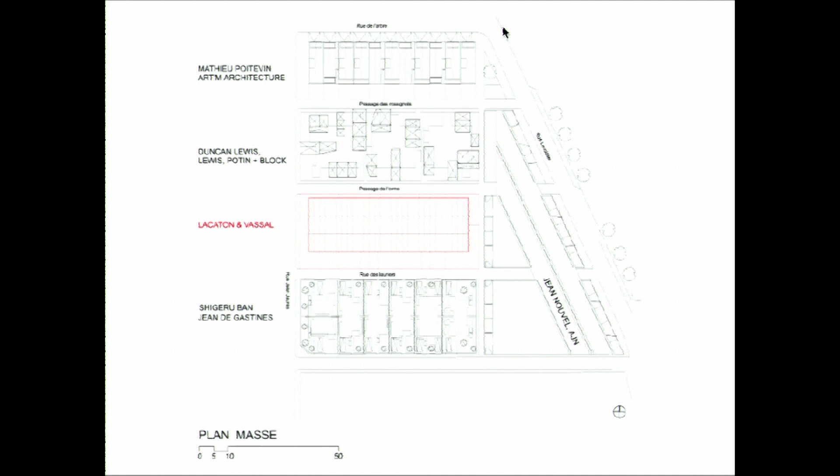But very early in the discussion with the client, we came to the relationship between the dimension of the dwelling and the cost of the rent. Because normally, it's not a regulation, but the rent is calculated in function of the surface of the apartment. And in that case, our proposition, as well as the one of Jean Nouvel, was to develop this very large housing. So we discussed that with the owner: if we engage to build these dwellings in the budget, you must, on your side, engage that you will not increase the rent because the dwellings are much bigger. You must engage to rent them in function of the type and not in function of the dimension.

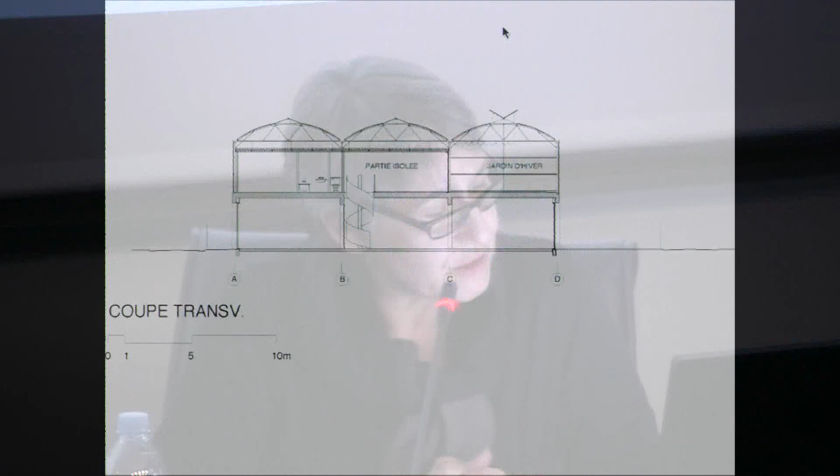So we agreed together, and at the end, we managed to make the project, and he did what he promised. So the construction arrived to make this project in the same cost. Of course, it's not a kind of magical project, but it's a very rigorous work, starting from the structure. The first thing is to build a very efficient and cheap structure. We work always with open structure. It means columns, beams and floors. We hate to make walls, and we try always to avoid solid walls, because we think that it's more interesting to have open structure.

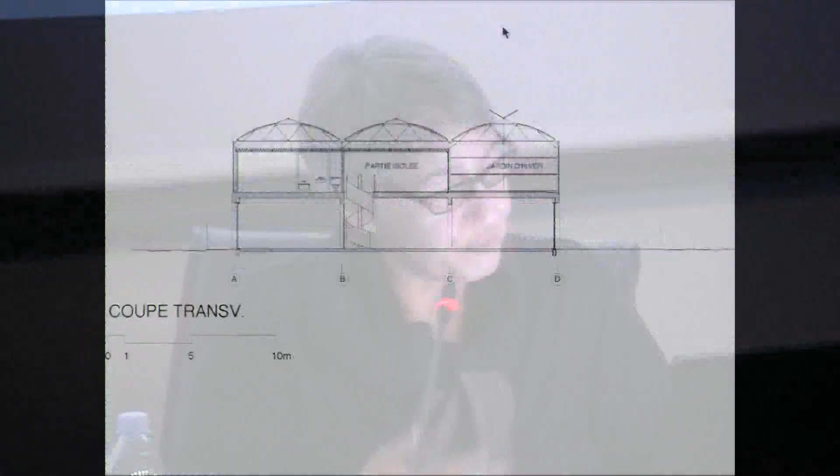So in that case, we thought that we could build first a very, very big loft. And we proposed to build a construction with a ground level made with concrete platforms on concrete columns 3 meters high. And on the top of this platform, to build 3 ranks of greenhouses. But these greenhouses come from the catalog of prefabrication, so we didn't design anything of these greenhouses, but just decided the dimensions, how many openings, and some of the materials.

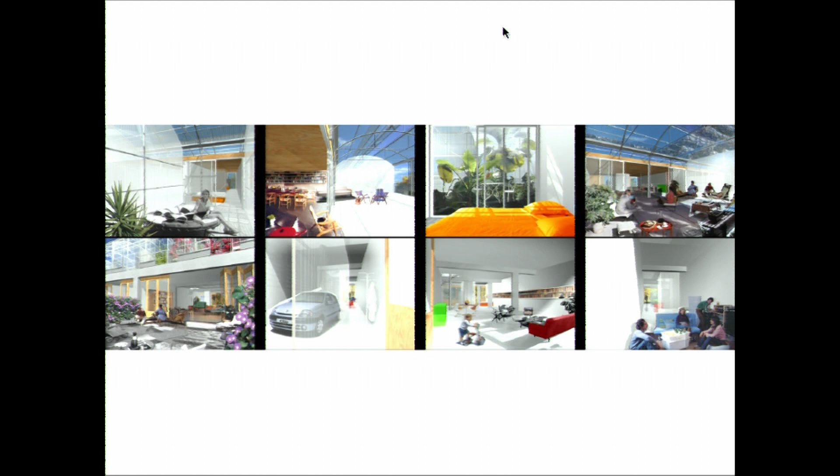So that was the first step of the design, to use 100% of the ground that we could use, and then we proposed that every dwelling would have 2 levels, spaces on ground floor and spaces on the first floor, to have the 2 atmospheres inside the house.

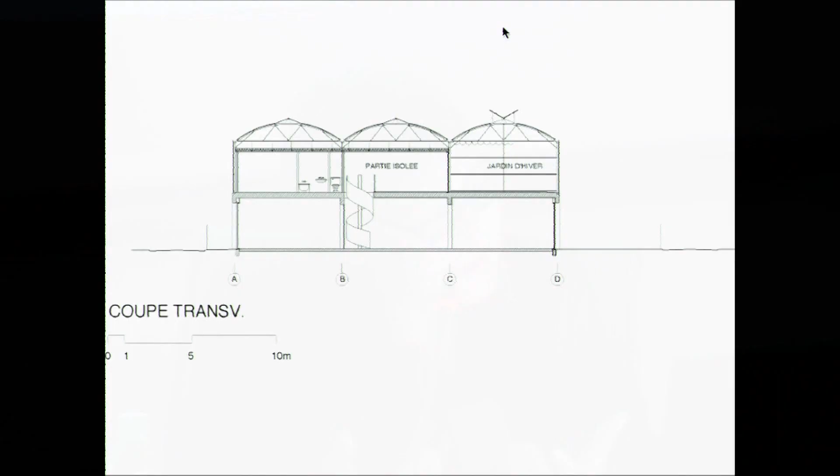The greenhouses were also very interesting in terms of bioclimatic construction, because it takes all the sun to heat the house in winter. There was very large ventilation, so in summer it's quite a good atmosphere. And the greenhouses make a kind of intermediate climate between outside and inside, and it prepares external conditions to inside conditions, and the difference between inside and outside becomes lower.

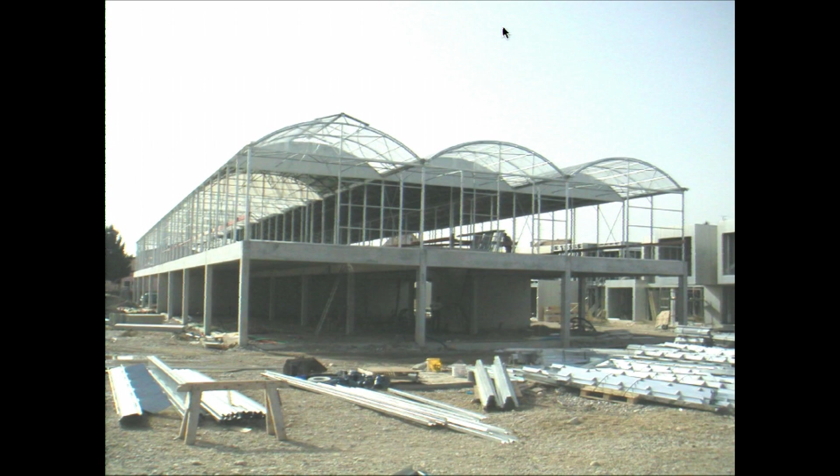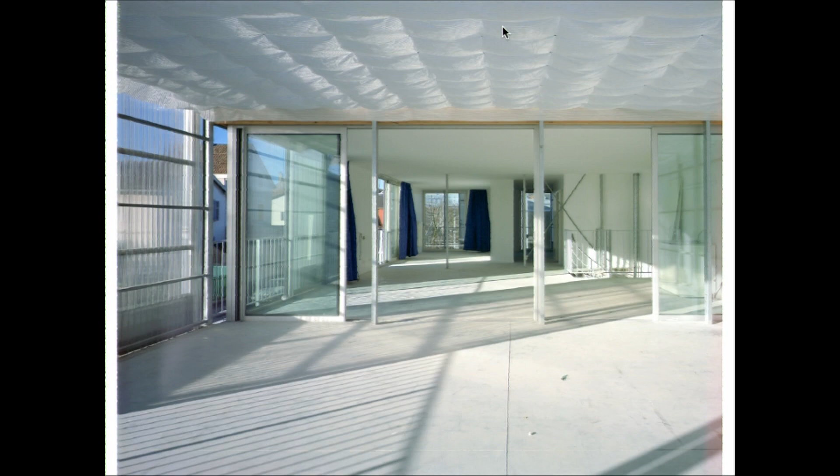Then we started the construction, because we had the contractors, and we could build this project within the cost which was given. So the ground floor with this platform, the 3 ranks of greenhouse, and the project completed for 14 families. The dwellings are empty before the families come. It's a very big open space. The living rooms have an average of 60 square meters. And the dwellings are in between 130 and 185.

We use for the greenhouses all the systems that allow to create the best climate, including 2 kinds of curtains, thermal curtains, but also solar protection curtains. And this was the construction. Then the second step after building this very big volume was to divide it in 14 dwellings.

As explained, we wanted every dwelling to have part on ground floor and another part on first floor. We proposed that every dwelling should have 2 orientations, crossing orientations, and 2 dwellings are combined. One is quite big on ground floor and small on the first floor, and the other one is the opposite. It's small on the ground floor and large on the first floor. And on each corner, it's the special small apartments or special big apartments.

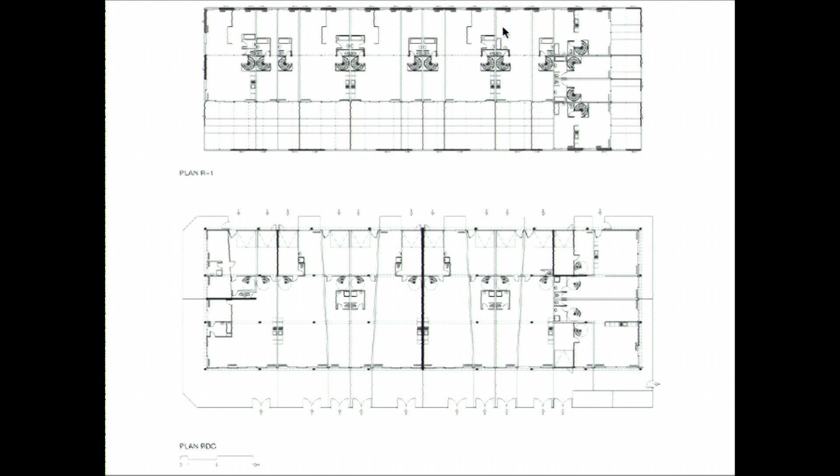So the other point was to make the divisions. We said that every living room should have a glass window 6 to 7 meters large, and every bedroom should have 3 meters. So it gave us a division of the periphery, and we could design every apartment. So some pictures of the apartments some time after the completion.

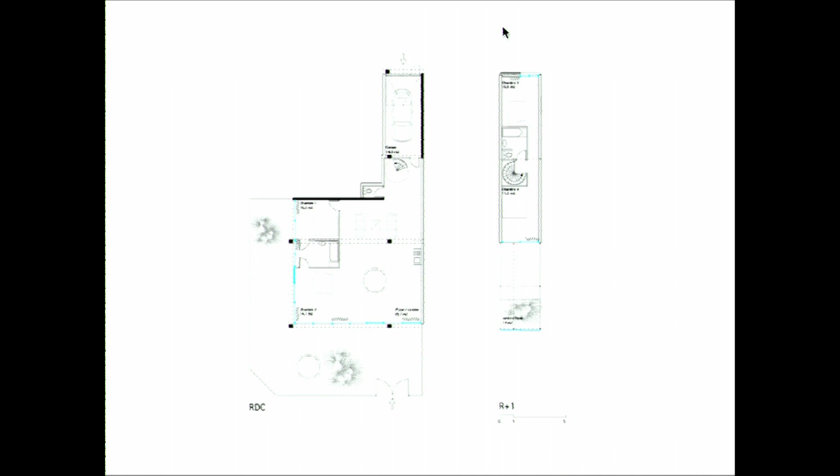As you can see, many apartments have no partitions because we considered them in a way as a loft. Normally, a loft is a space gained in industry or buildings which are not made for residential. But the space is very often so big that you don't need to introduce partitions, because the space acts as a partition. So in this project we proposed to do the same, to make the experience of not making partitions, but the owner had doubts a little bit, and we agreed.

He also asked all the other architects to come back every 6 months after the completion during 2 years to meet the inhabitants, to discuss with them, to see what was not working, and eventually to change something. So we were ready, if the families asked for partitions, to introduce partitions. But finally, after 2 years, no family asked for partitions, and they arranged themselves.

So it's very important to consider that what we hear very often from developers is that we must build standard housing because all families are standard families, that all people live in the same way. But in fact, you can think differently, and if you provide different conditions, people know how to use it, and you don't have to explain to everybody how they should live. If you give the best conditions, they know how to live inside.

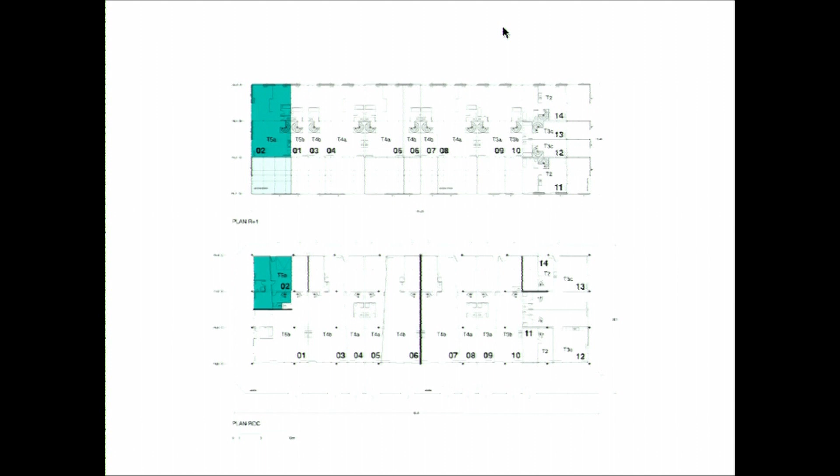So the little winter garden, sometimes in front of the bedrooms. Another dwelling, which has 2 bedrooms on ground floor and 2 bedrooms on the first floor. The ground floor in front of the bedrooms has a little swimming pool, only in summer. Here you can see these thermal curtains, whose outside face is aluminium to reflect the sun, and it's put very close to the glass. So in winter it keeps the temperature inside, and in summer it reflects the sun.

And this winter garden in front of the living room was 40 square meters. It's interesting to think that this kind of housing is very interesting to develop in cities, to introduce again this idea of living in a house, even in a dense context. We think this kind of housing could be superimposed to make big buildings, but for us it's one of the conditions to make the densification of cities acceptable to people, to give the best individual conditions. Densification should not be compression of individuals, but the opposite, it should allow to give more to each individual.

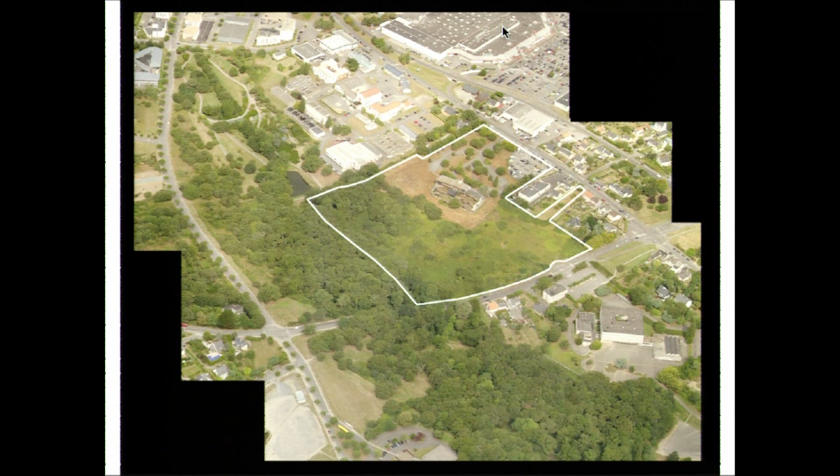But the plot where we had to make this project was quite a nice forest, but this forest was reducing and was dying. And the competition was to make, for this eco neighborhood, 250 individual houses on this plot. So this competition was very disturbing, because on one hand, there were these requirements to make ecological development, and on the other hand, 250 houses were asked.

And when we did the first test, they covered all the floor, and there was not anymore any forest. So we were really disturbed in this first phase of the competition, and finally we were close to thinking that maybe an ecological neighborhood should better reinvest some parts of the city which are already built, much more than build on existing forests. But that was the first intuition, and we started to work even on this project.

In the middle here, there was a very nice building, which was part of a little university, but it was abandoned, and they planned to demolish this building. So the visit on the site, and it's why it's so important to have the feet on the floor and not to see the thing from the sky or from the side, it's because all these feelings were very strong when we were walking on the site with this forest. We were working with a landscaper, who focused on all the qualities of this place.

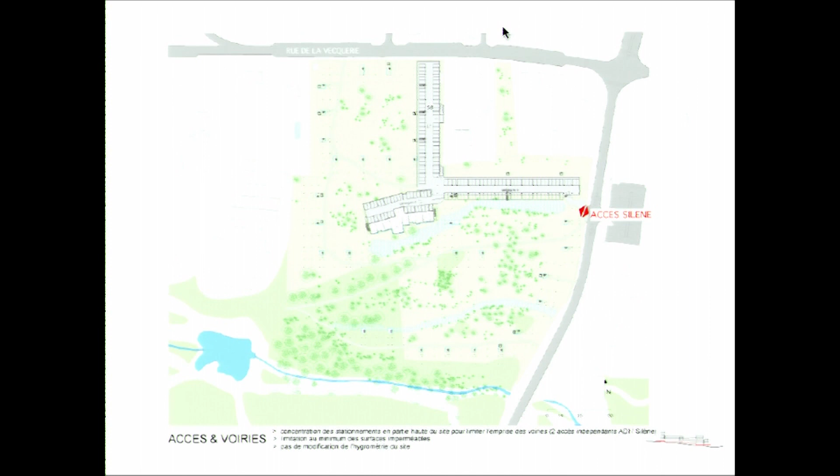So we proposed to make this platform at 12 meters above the ground, which was built with steel elements with very low impact foundations, only columns in the ground. So here this is the ground floor, where you see only some little stairs which were hung on the platform and some elevators. Then at 9 meters above ground, there was a common pathway to serve all the stairs, all the elevators.

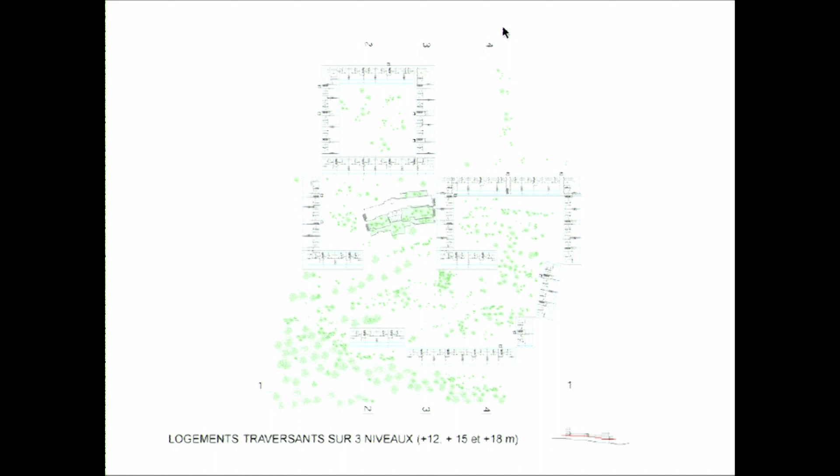And the first level of housing was 12 meters above, which was the top of the canopy of the trees. And there were three levels of dwellings at 12, 15, and 18 meters. So that's a section on all the ground, and this construction allowed us to keep the forest in totality, and to think that the forest could restart and evolve in a good way.

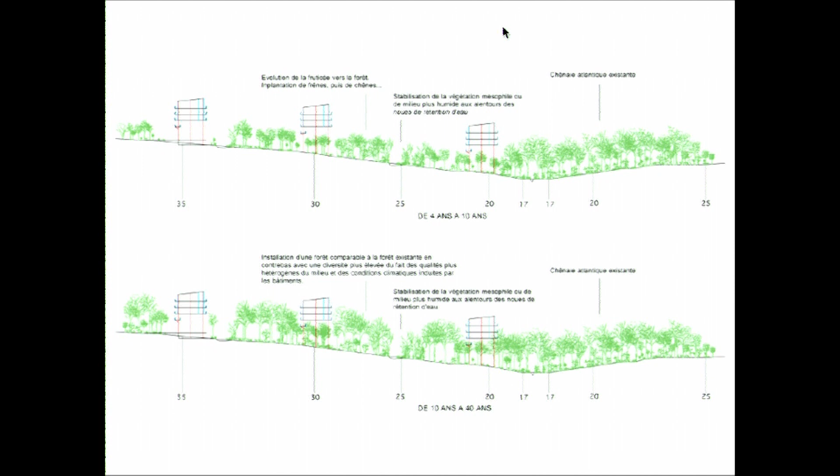These were some tests of the landscaper, the existing, then 4 and 10 years later. And then here we could expect that 10 to 40 years later the forest could come again, natural forest. And also it was interesting because the ground could be kept as a public park or public forest as it was before. So unfortunately we lost the competition. But the project is never lost, and I think that sooner or later, we can reintroduce this idea somewhere in another context. So that was the past.

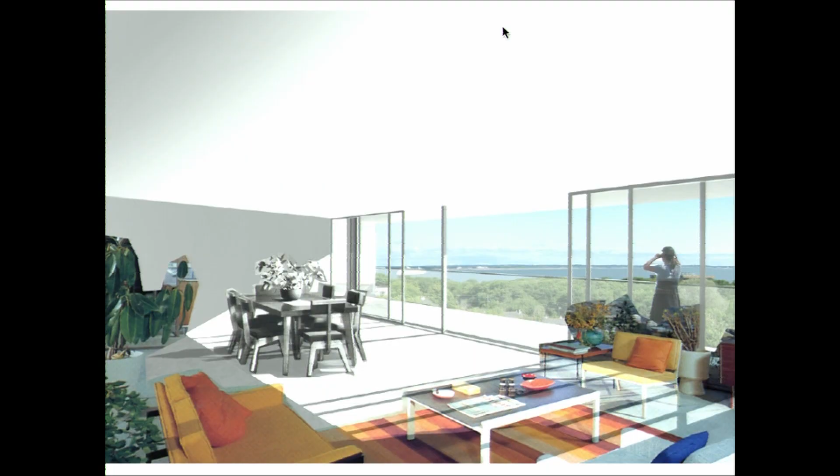So reinvent the standards. It's not only working for housing, but it can be the same for a school of architecture, and that was a competition that we were invited to in 2005, I think, or 2003, in the city of Nantes. It was a new school of architecture in the city, which already had a school, but the school was not in the city. It was in the close suburb.

And they needed to extend the school of architecture, and the school wanted to take this opportunity to leave their site and come back to the city, on an island in the center of the city, which was a former industrial site, because all the industries had moved, had quit. So there was an ambitious master plan to redevelop a new neighborhood here and to become the new city center. So the plot, the site was here.

It was divided in 2 parts, and we were free in the competition to build on both plots or only on the biggest one. So for this project, we proposed in the competition to work in 2 steps. The first step was to follow the requirements of the school, to make an open space where they could develop different kinds of pedagogy, different fields of architecture, but not only.

So we proposed, in the first step, to say that maybe the most important thing in a city is to create floors. So the first step of the project was to make three floors with very high load capacity. The first one was at 9 meters above the ground, the second was at 16 meters, and the third was at 23 meters, with a possibility of 1,000 kilos on each floor, which allowed rebuilding on the floor without having to make new foundations.

And the ground was not a concrete ground; it was the floor of the city with a slope, because for us it should be connected to all the public space around. We didn't want to have a kind of plinth or basement, but to have the continuity of the public ground inside the school. And then, after making these floors, we proposed to make a very large ramp which could serve all the levels by walking, but also with bikes, or exceptionally with cars.

So the grid was very efficient, a grid of columns, 10 by 10, with prefabricated slabs 10 meters long, two cores with stairs and elevators, which also ensured the stability of the building. And the ramp is running on the longest side to have a very slow slope until the last level, which was also the roof of the building.

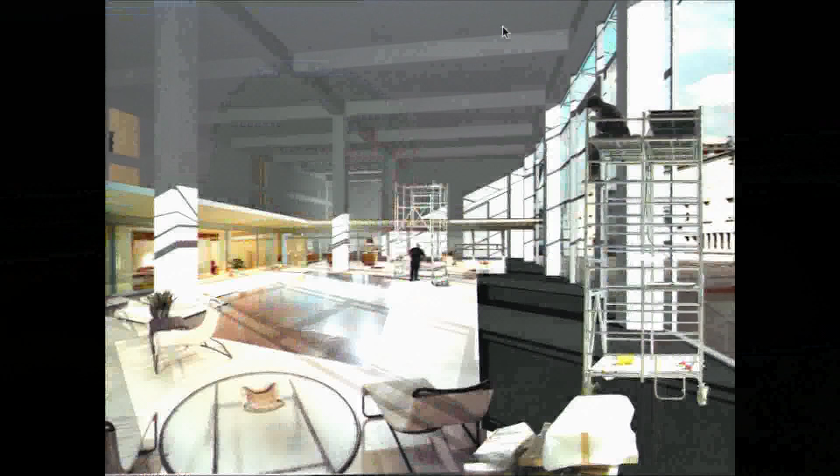And that was this first step, with this big structure that for us could receive a school of architecture, but maybe in 20 or 30 years be recycled to another program, but the grounds should stay in place. And then we delivered some renderings of what could be possible in a very big hall of 9 meters under the ceiling, to build models at scale 1 to 1.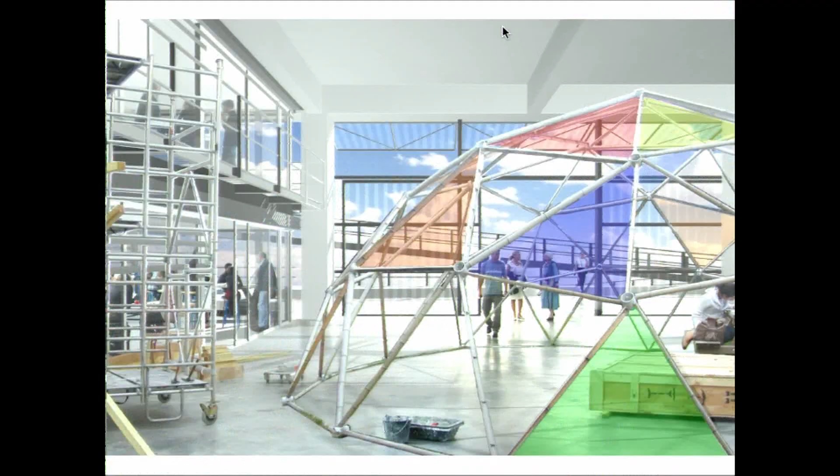The other levels had 7 meters under the ceiling, so it allowed redividing in two if necessary. The project studios open to the big terraces. And the last level, which was also the roof of the building.

So as you said in your first words, for us it was important, exactly as for the first house or all the other dwellings, to consider that the program of 9,000 square meters for 800 to 1,000 students was already too restricted, and that we should develop more, not in terms of programmatic space, but as extra space without any function, because it's important that this extra space has no clear function, but is given to the appropriation of the school.

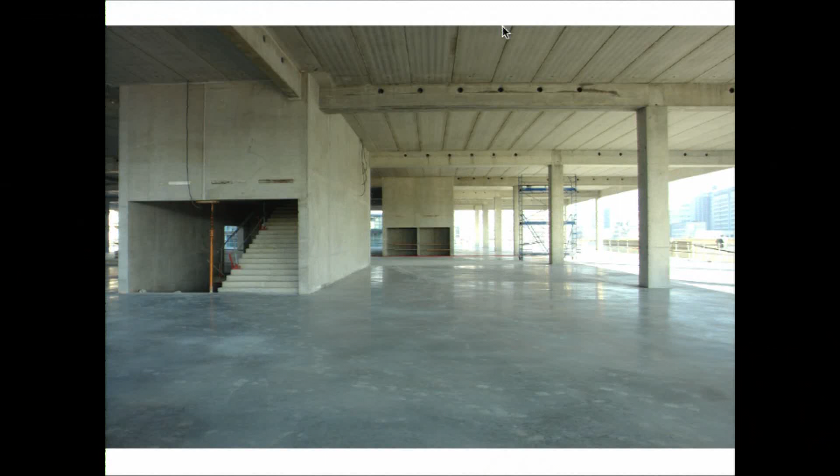So we started the construction. Everything was prefabricated, and it was quite easy to build with the columns and these big slabs. And that was the completion of this first step of building a capable structure that could receive many functions, and first the School of Architecture. And then, in the competition, we organized a program inside. And we said that if we won the competition, we were ready to come back to this step of only the structure and to make the program of the school with the school.

But finally, we won the competition, and they decided that the project was interesting for us, and we went on to the process of building. Here again, the question of economy was very important, because if you propose to make more space, it should not cost more, because if not, your project has no chance to be accepted. So it's important to work a lot again on the question of structures to give you these margins of freedom to organize the program, and to organize all the program in the budget.

So we also built a little building in front here, but in a different way, because the plot was very small. So we used a steel structure. And here, the ground floor is for exhibitions, and the other levels are the research departments and administration.

Then the second step was to build inside a secondary structure, which was a light structure with steel, which didn't need to rebuild foundations, because the floors were capable enough to receive this, and it allowed us to install the program. On the ground floor there are 2 auditoriums, and the other floors were for the classrooms, the library, but also the studios for the project.

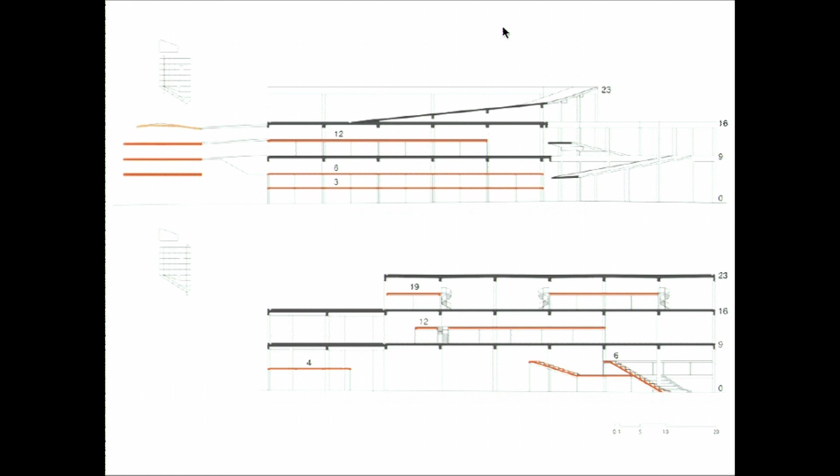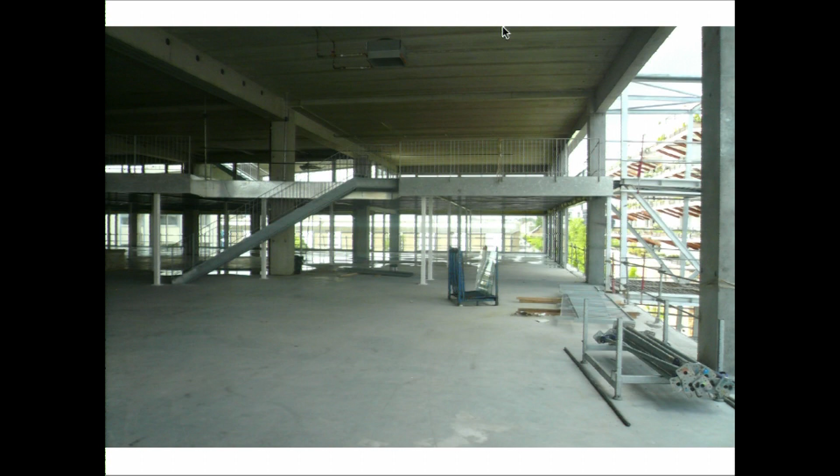The ground floor has almost no real pedagogical function. It was much more a place open for public activities. And the other levels are much more given to the school. So those were the floors. And the secondary structures that were introduced inside could be removed or changed on a scale of some years.

And then the school was completed in 2009. All this extra space is also intermediate space that allows here again to transform a little bit the external climate and prepare better conditions for the rooms which have heating. A small plaza in front, just in front of the river. The entrance of the school and the start of the ramp. The ground floor with the cafeteria. And this large volume of 1,000 square meters.

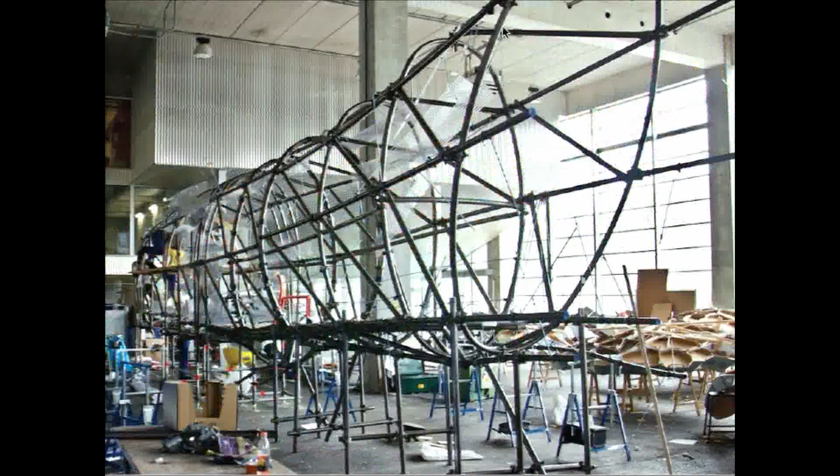The program is to make models at big scales, but it's also very often used for other activities, such as parties or concerts. The large auditorium, which is, of course, to give courses, but we put good seats, and they can also invite theaters, or in the school too. There is a department for scenography, and we made a very big door open to the city and to the river to extend the scene of this auditorium.

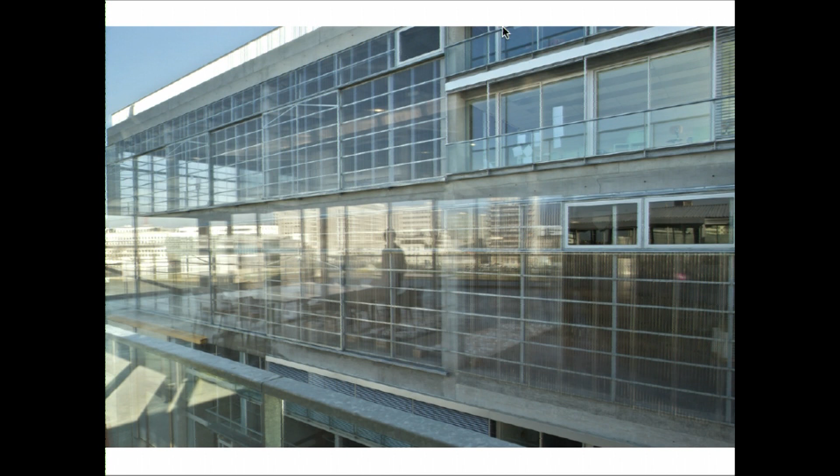And some very unexpected uses on Saturdays. And I will pass quite fast through all these pictures because they show how many uses these spaces can create. So at the beginning it was a little bit controversial, but finally year after year the appropriation is much better, and now everybody uses all the spaces, sometimes with a lot of activities, sometimes less, but it's also the life of the school to have empty times, but also full times.

So there are two kinds of space. There are the very conventional spaces such as the classrooms, studios, library, offices, but also very large spaces close to these conventional spaces, which can be an extension of all the activities. These terraces are at the junction of ramps. And all this space allows many free uses to develop. So starting from an empty space delivered at completion, there could be a lot of appropriations.

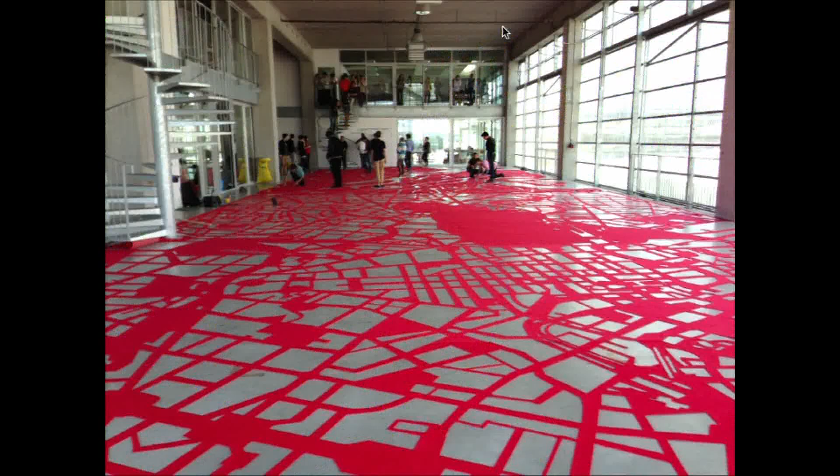This one was a model of an interpretation of the city of Berlin. It was a workshop. This is the place for the scenography, a normal classroom with tables, but always this possibility of extension of activities.

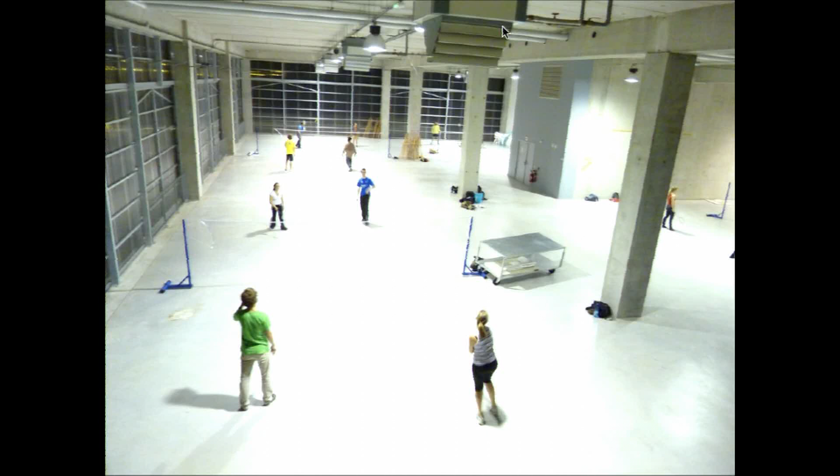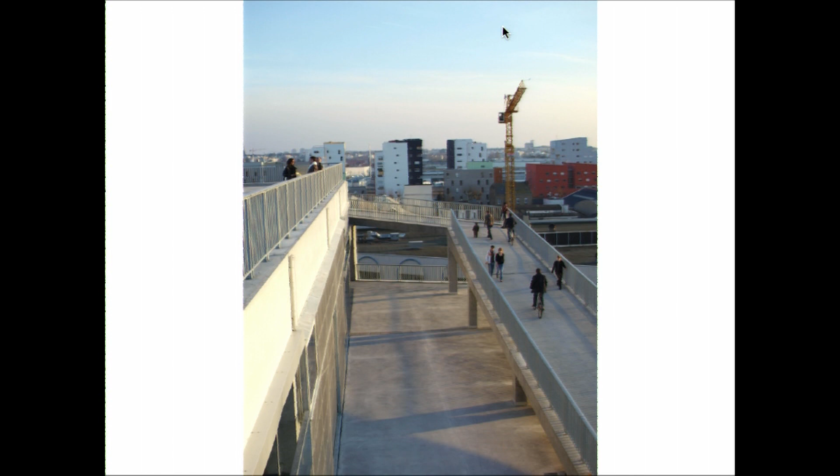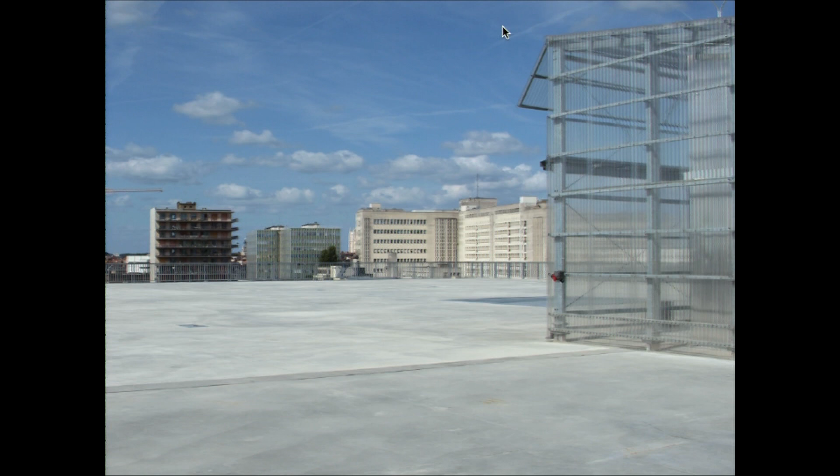So starting from 9,000 square meters of program, we built 18,000 square meters of inside space and 26,000 square meters in total. It means that there are also 8,000 square meters of external space in different terraces, but also the last terrace. So some badminton competitions. And the ramp, which is connecting all the levels, which is also the place for some Saturday activities. The ramp is open to the public, also to visit this place.

This is the last floor, the last level, which is an open level, like a big plaza in the sky of the city. It is 2,500 square meters. And it's also a balcony to see some events in the city, because very close by they built this big pavilion for theaters. And the overview on the city, and the school at night, which is open until midnight.

So reinvent is also to transform, and especially transform the existing modernist social housing developments that many cities have in their suburbs, and very often nowadays they are rejected neighborhoods. In France, 10 years ago, there was an important national program developed by the French government about urban renovation of these neighborhoods.

This program was based on demolition and rebuilding of a quite important quantity of dwellings. I think the program was nearly based on 200,000 dwellings demolished and rebuilt, for a very important cost, because at the time 15 billion euros were given to this program.

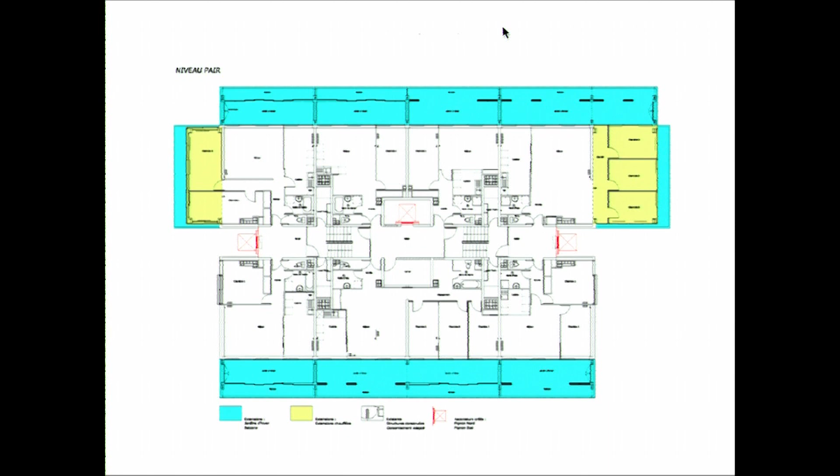So in the competition, we proposed the project again, starting from the quality of the housing. The title of the competition was Metamorphosis of this building, but we considered that for us, the problem was not the form of the building, but much more the quality of living inside. We proposed two main ideas. The first was to enlarge all the apartments, to give a better quality of housing, a kind of outside space, to reopen the facades, to introduce more light, and to make technical refurbishments for heating, bathroom, electricity, and so on.

And the second point was that we proposed to make these works without emptying the building, but while keeping all the families inside for those who wanted to stay during the works. That was our proposition, and we won the project on this proposition, and then we started to study.

So the proposition, because if you propose to keep the people inside during the works, it's very important to think at the same time as making the project about the method of works, because it's most important to imagine what the life would be in the building while construction is going on. So the works was to make the extension with prefabricated modules that we could build outside the site, bring them on site, and build them in front of the facade, using them as scaffoldings to take away the existing facade and build the new one in front.

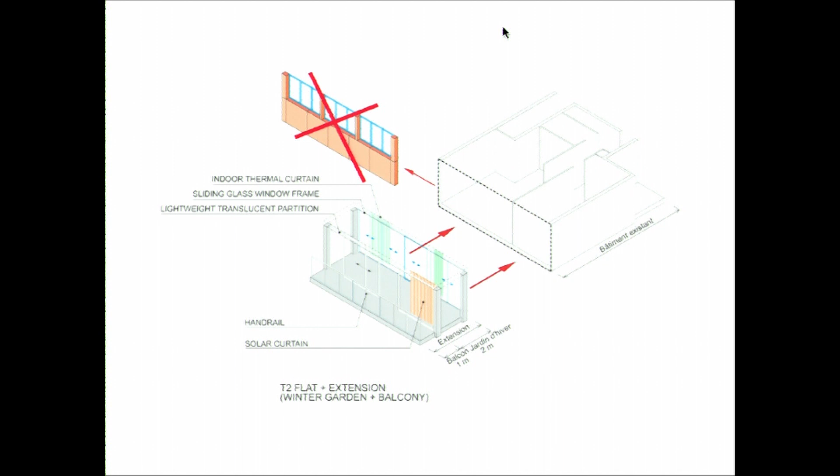These modules were totally independent. They had their own structure, their own foundations. They were just a little connected to the building, but not supported by it. Also for us, it was one way to build quite fast for this new transformation.

The existing facade, there were two facades, the original one and the second one, built in the 80s, and both of these facades had asbestos, amianto. So it was also a special work to take away these two facades.

So these modules were 3 meters large. They had a glass facade with large sliding doors that could replace the existing facade. Then there was a second facade, which was more light, with sliding panels with polycarbonate that could be closed or opened, and 1 meter of balcony. So the method was to build these modules in front and to extend all the apartments all around the block.

Then after the competition, we did also meetings with inhabitants. It was one of the requirements of the owner. The owner is City of Paris, meaning it's public housing. All the apartments are rented, it's not private owners.

So we did these meetings to explain the project. First it was a collective meeting, then we met all the families in particular, then we visited all the apartments. We could also see that many people were asking for nothing because they didn't want to have to move from there.

But many families were not in a good situation. Some young families with 2 children had very small apartments. Some families living there for 40 years were now aged and had a large apartment, but they were only 2 people. They preferred to pay rent for a bigger apartment because they wanted to stay in this neighborhood.

So we asked the owner to start a very transparent process and to put all these questions on the table that could be discussed, as well as the cost of the rent after the construction. There was an association of the tenants with representatives who discussed all these questions with the owner, and they agreed on the cost of the rent after construction so that all the apartments could remain affordable for all the families living there.

And there was also a sort of, not statistic, but meetings made with all the tenants, neither by the architects nor by the client, but by sociologists who asked every family about their requirements, if they wanted to change the dwelling, what they could pay. Finally, we got all the results of these discussions, and the owner agreed that every family could change if we could find a solution to place everybody properly.

Finally, there were around 60% of families who wanted to stay in their dwellings, and 40% who asked for a change. And we arrived finally to find the right location for everyone.

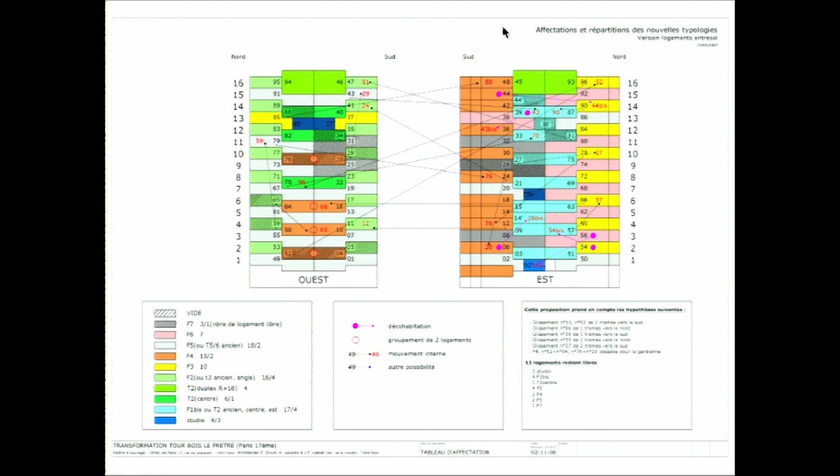Then we did a little prototype at scale 1:1 to make the visits, and then the tenants, the inhabitants, voted, and they voted in favor of the project, so we could start the construction.

So that was the prototype, which was made at the place of the contractor. Just a word about the construction: it's a steel construction, because it was very important that the modules could be less than 6,000 to 7,000 kilos.

We did the prototype with a concrete module because the contractor didn't want to make it on steel, and it was 10,000 kilos, so it was totally impossible to imagine building these modules on 50 meters. We had to struggle with engineers and contractors to keep the method of building on steel. One or two times we had to say we stop because we don't agree with what you want to do, and finally we gained, and we could build this construction in steel.

It's important to understand that for an architect, it's not only making the project which is important. We also have to defend everything: the construction, the cost, the quality of architecture, the space, and defend it all together up to the end of the project, making no compromise. Sometimes it could be easy to say okay, you are right, it costs too much, so we reduce our ambition of space or dimension of extension. But we were completely convinced we could complete the project in all aspects in the best way, with the budget we had. We defended this idea every day during the whole project, and finally I think we were right, and we could arrive to the end.

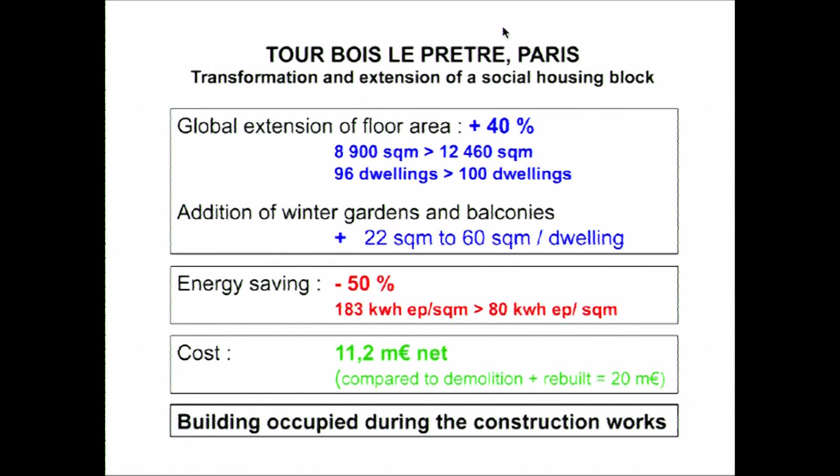Just some data, very fast. We extended every apartment between 22 and 60 square meters, just by making this double skin, this space. It finally has the same effect as only insulation, because we gain 50% of energy just by making this intermediate space. The cost was 11.2 million, compared to demolition and rebuild, an estimation from the owner before deciding to make the transformation, which was 20 million—so nearly half. And the building was occupied during the construction.

It's very difficult, this project has a lot of success, but anyway we don't have so many other projects to do. We have this one, which started nearly at the same time, and we are very close to completing it. It's a different neighborhood, but we had to work on a little block, quite usual level of four apartments, a little bit small.

The problem here was precisely the living room, which was very small, and we decided to remove the bathroom in one bedroom and build an additional bedroom outside, connected to the living room by an extension, winter garden, and balcony, finally redefining a new apartment which has 33 square meters more.

We could do that for the 4 apartments, but because the density on ground at this site is very low, we also proposed a densification, making 2 additional wings of new construction, which allow us to incorporate the extension of the existing building but also create new dwellings on ground already owned by the owner, with all networks, with everything.

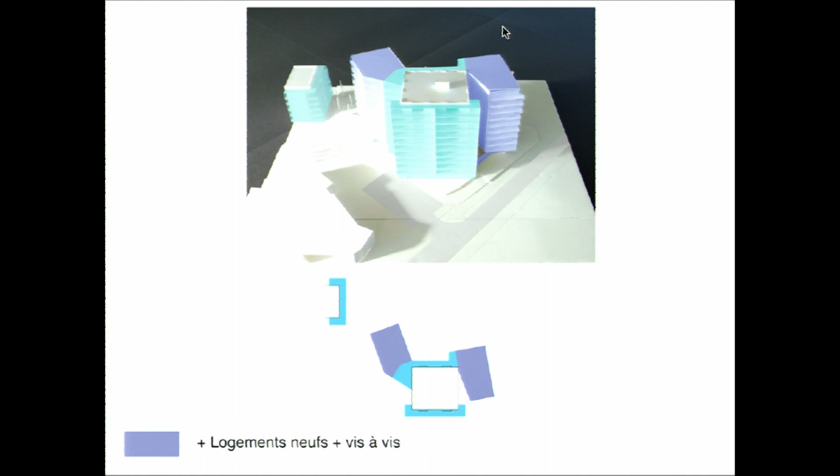So it was, in a way, an economy for the owner. So this project was accepted, and we did the studies, and we have now nearly completed the construction. So that was the plan. So starting again from the quality of housing, from the interior space, that produced a radical change of the building, and it gained a new life, but a durable life, because the quality of space is there for a very long time.

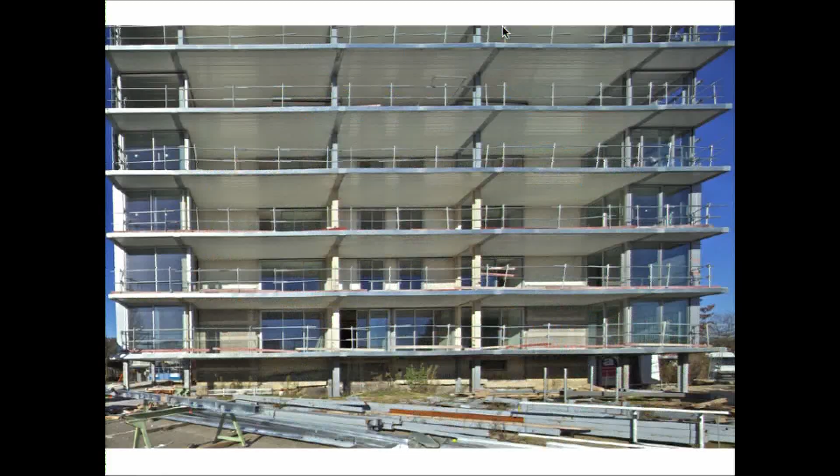So the construction is dry construction made with steel and prefabricated slabs, steel and concrete. And we built quite fast around the existing and the new wings. So it allowed us to open the living rooms to this extension, and to give in front of every existing apartment 3 meters in front. The new extensions, the 2 wings that we built on every side.

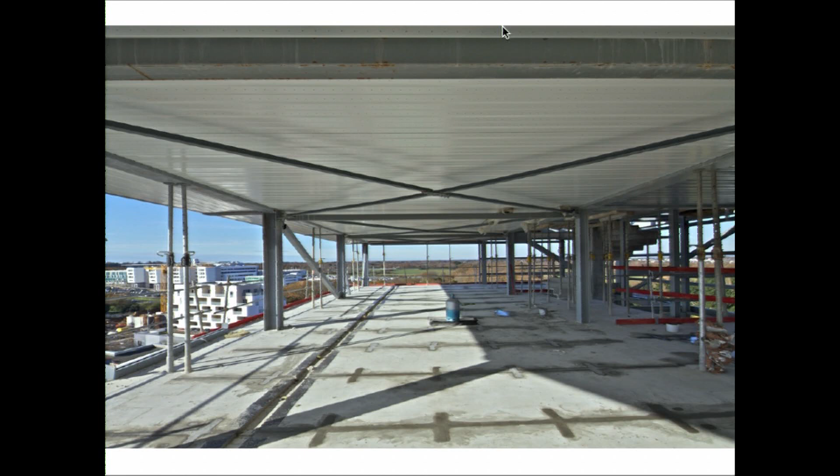Here again, an open structure which allows to put the partitions. The partitions are not part of the structure, so it allows to make different types of housing. And the building nearly completed. And the cost here is 40,000 euros for the transformation of the existing, and 100,000 for the new housing. So it means that at the end, it's an average of 70,000 euros for 80 quite new dwellings, which is a quite low cost, because the average of construction in France is around 120,000 for a new dwelling.

And the inside of the construction, here on the first floor, on the middle height of the building, and the highest, the 10th floor, with these views, and always this extension that gives the freedom and the better possibilities to every dwelling.

So we also, we don't have pictures, but we will start in January construction for the transformation of 530 dwellings in Bordeaux. Also in a site which is 100% occupied, and we will not remove any inhabitant. So it's interesting to see that if you work like that, not in terms of large territory, master plan, but in considering many individual situations in the city, you can find here and there an enormous amount of interesting projects where you can improve the quality of housing, where you can find densification without having to expand the cities so much.

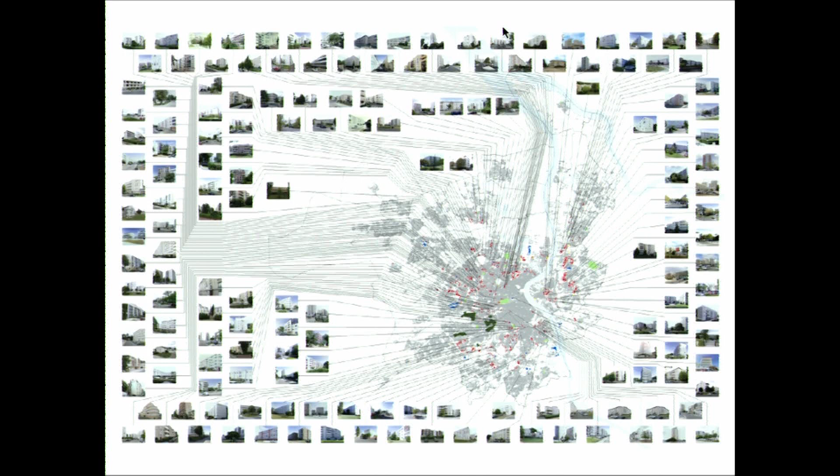Here it's the city of Bordeaux, and it was a study asked of some architects, and we could see that in the next 5 years, they can find the possibility to build more than 50,000 new dwellings on existing lands without having to go outside the limits of the city. So that's a very promising situation, and we know that every city has buildings like these, in Paris or in Saint-Nazaire, many housing buildings like that, where we have possibilities to do that.

And just a last project, again, in terms of transformation. It's a project that we have very recently completed, which is not housing, but a contemporary art collection, a public contemporary art collection, because in France we have 20 buildings like...

You can go? I can go?

Okay, thank you. And that was on this site in the north of France. It was an industrial, very active site where they built big boats, and this industry closed in the 70s, 80s, and finally they totally emptied the site in order to make a new development, and they kept only this building, which in a way was a kind of symbol of the former industrial era. And the program for the competition was to fill this building with this new place for contemporary art. So we were invited for the competition. So this is the building, very close.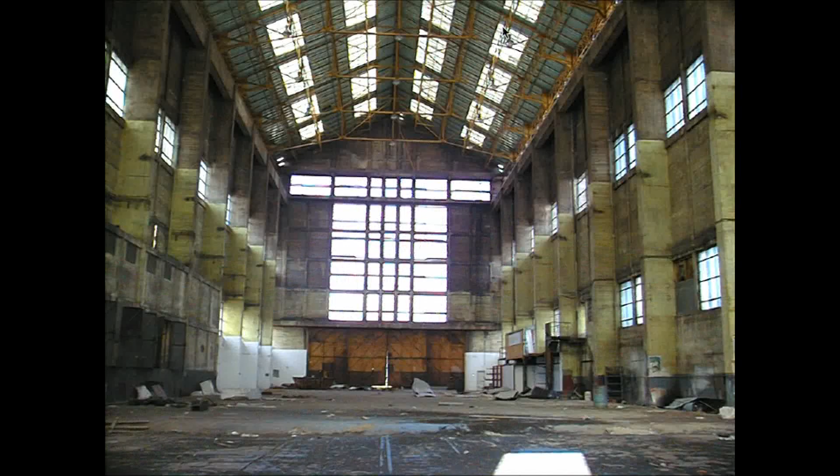So inside the building, it was a very huge space, 75 meters long, 25 meters wide, and 35 meters high, totally empty. And we were really impressed and very touched by this space, which reminded us of the Tate Modern in London. It's nearly the same section, but the Tate Modern is twice as long. But for those who know this place in London, and you can remember which kind of exhibitions there were there, it's really an amazing space.

So very early in the competition, we really had this intuition that it was a pity to have to sacrifice this space and to fill it with floors, with storage for artworks. And this was always an obsession in our mind, that we couldn't do that. But we did the exercise all the same, to fill this place. And in fact, it was interesting because making this exercise, we had to imagine how to use the height of the building, because it was 35 meters.

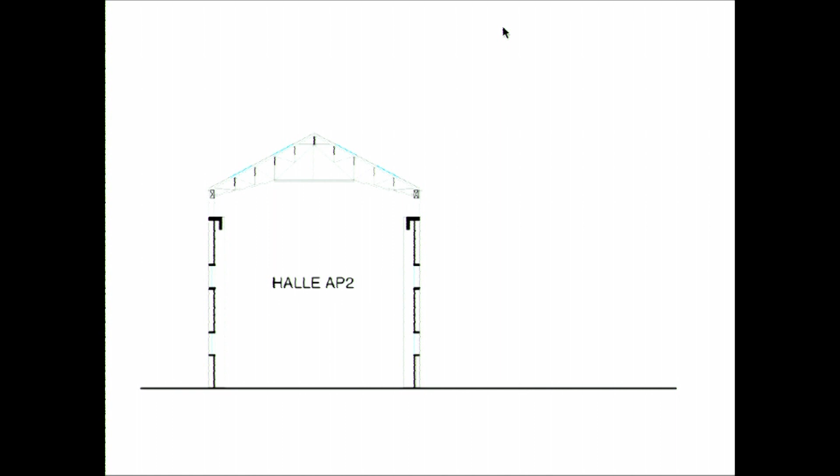But finally, we returned to our first idea, and our proposition for the competition was to let this all totally empty and to build an additional building, which was exactly the same on the side of the existing, but which could contain all the new spaces of exhibition space, storage, with all the required conditions of height, of humidity, of air conditioning, because they keep inside the artworks.

And we could keep like that the hall totally empty. And in a way, that was here also, again, this idea that we develop in many projects, build a double, but in that case, a double was already there. So then the project was to put the functions inside the building. The second building was exactly the same dimensions, because for us it was maybe the only way first not to make a competition between the two architectures, but to give to both architectures an equal value.

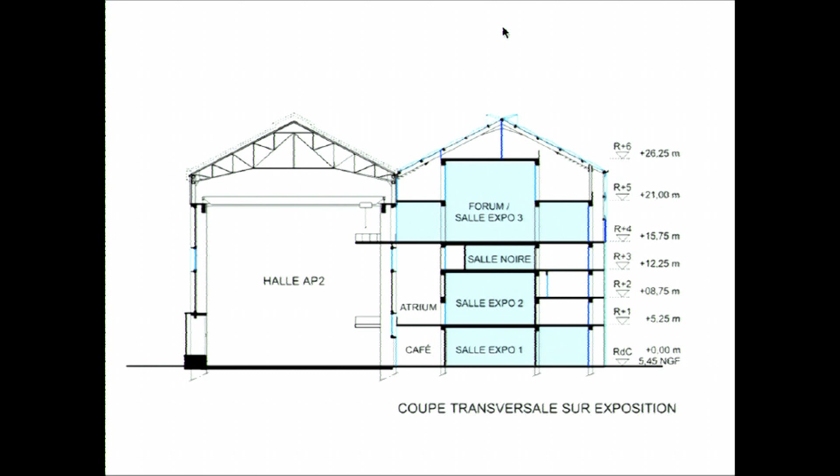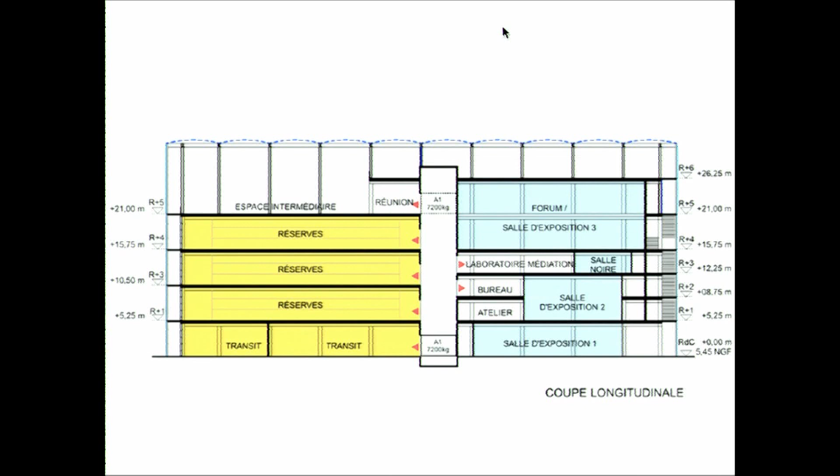The long section with half in yellow dedicated to the storage, and on the right part for the exhibition, and in between a very, very big lift. And under the roof, there was an additional space, which was an extra space given by the form of the project, which was given to the intermediate exhibition space.

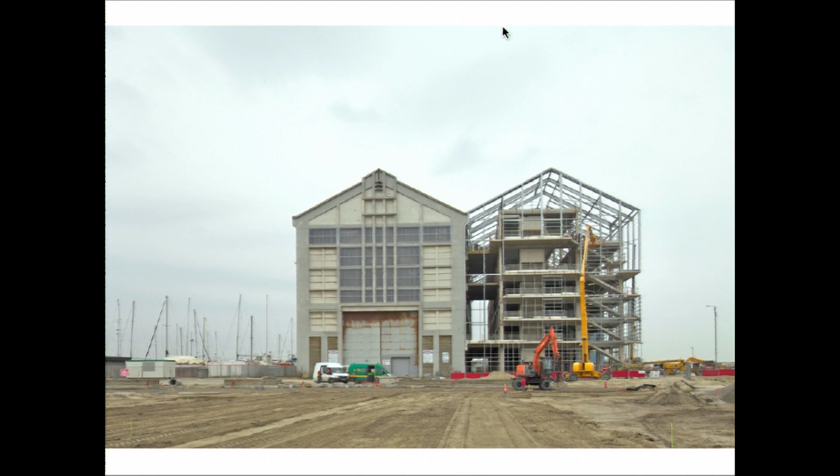Then we won the competition. Even at first we were nearly rejected because they considered that we were out of the brief. But finally, nothing in the requirements said that it was forbidden to make that. So we were reintegrated in the jury, and finally we won the competition at the end of the day of the jury.

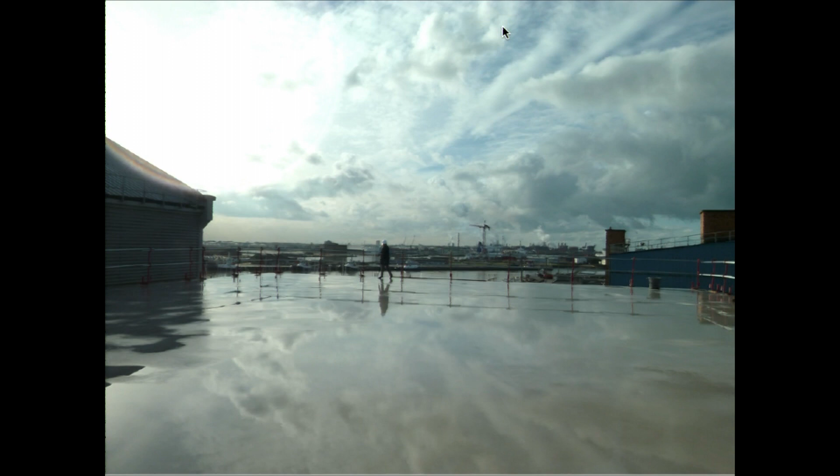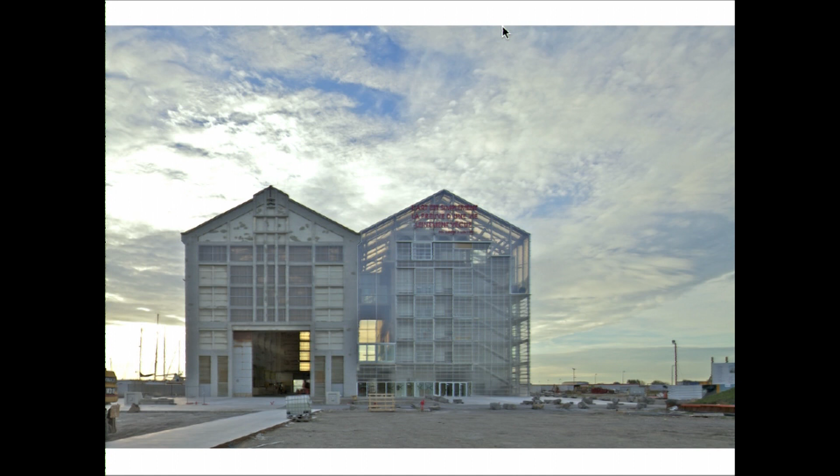So we started then the works with a strong steel structure that allowed to develop high volumes for exhibition. And the last level, which opened views to the surroundings, and especially the harbor of the city on the west. And the building completed, which opened 1 month ago. So it's totally different from the existing, but it's made with our tools of nowadays, our constructing system of nowadays, and it fulfills all the requirements for the program.

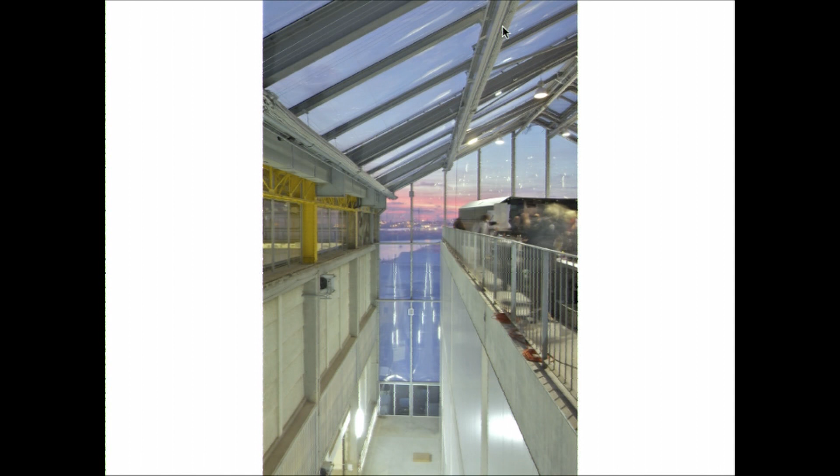And then some pictures of the opening day. So this space now is a new space for exhibition of 2,000 square meters. In between the existing and the new space, there is a kind of street, which was a requirement of the program to make a pass along the building. And this space under the ceiling, which opens views to the surroundings and to the sea. So here an artwork of an artist. And these views under this transparent ceiling.

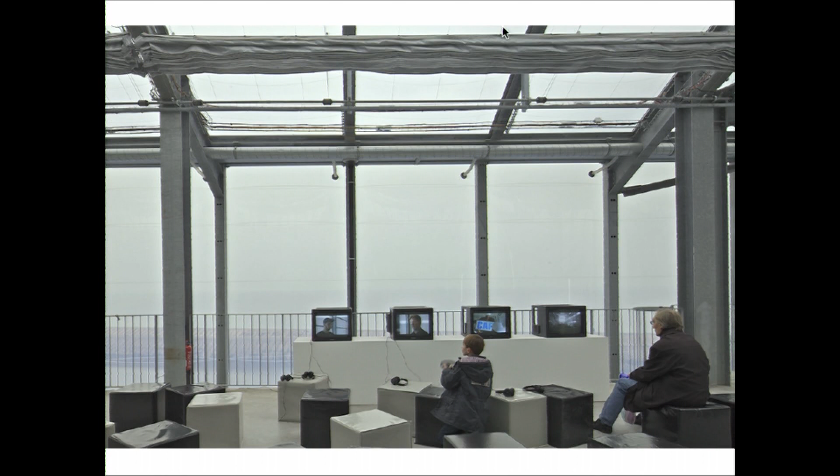So this extra space will be also used to share some exhibitions with some other institutions of Europe, not only in France, but especially of the north of Europe. The main exhibition space with 9 meters under ceiling. And the partitions are removable, so they can make displays, or they can also reopen the space if they have to make more installations.

In the existing hall, we have rebuilt a new moving crane, which no longer existed. So they can envisage to build quite big artworks in the space, but also to open it for any public event. A dark room only for movies or videos. The space for education, for schools. Another exhibition room open to this internal street.

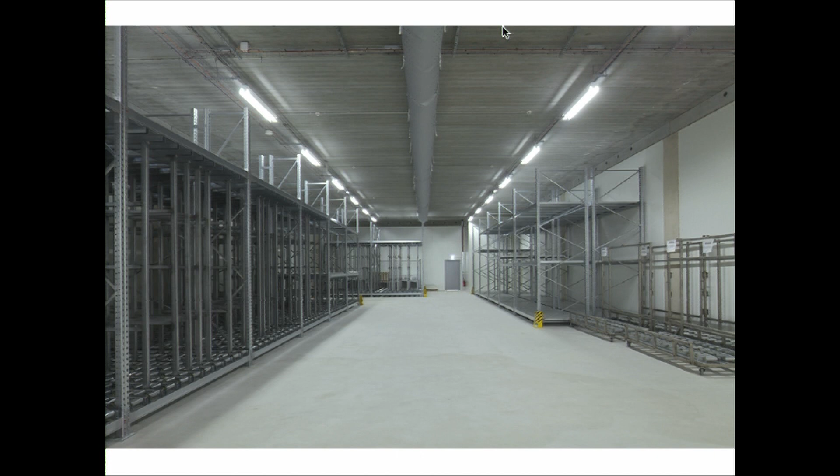The storage, not yet filled. And the stairs, which are not inside the building, but in between the double envelope. So it means that when you have visited the exhibition, if you want to move to another place, you always move to this semi-exterior space, and you have the light and the views. The ground floor, which is also an exhibition space. The coffee shop, this was made by an artist. And the openings to the existing hall.

And the last word is just to show this little project that we did some years ago in Bordeaux. It's a project to refurbish a plaza, and reinventing is also sometimes doing nothing. And the question for this project: how can you make this square more beautiful? We had 3 months to reply to this question and to bring a project of refurbishment.